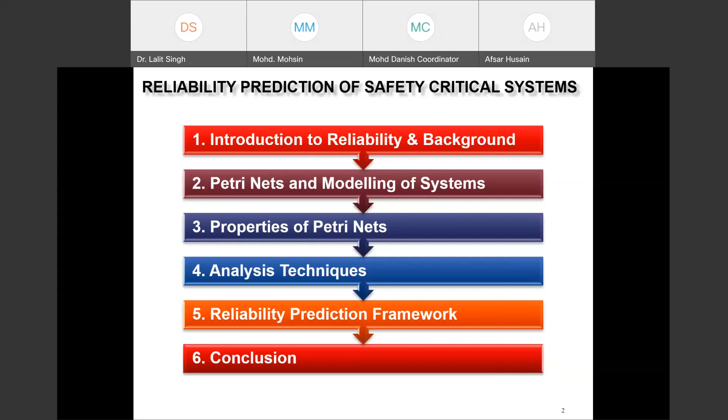Let us go through the mathematical definition of reliability. Suppose X is the random variable that represents the time to failure of a component, because the system comprises a lot of components. So X is a random variable representing the time required to fail a component.

If my target time is T, then the reliability of the component at time T, R(t), since reliability is a function of time, will be equal to the probability that this random variable must be greater than T. Because if it is less than T, it means it is failing before the target time, so it will not be reliable. So the condition for component reliability is that the failure time must be greater than the target time, meaning it should fail only after the target time gets completed.

From the total probability law, it can be equated to 1 minus the probability that X is less than or equal to T. This probability that X is less than or equal to T means the system has failed before the target time, so it is the failure probability. It can be written as 1 minus failure probability, which is also a function of time, with notation F(t). This failure probability can also be called unreliability. So reliability is equal to 1 minus unreliability.

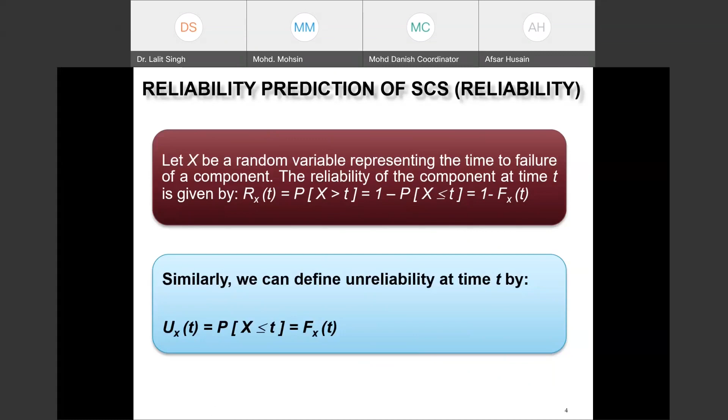Now let us look at some of the traditional methods for the quantification of reliability, before going to the Petri net modeling technique.

One of the prominent models is the reliability block diagram. It is a series and parallel reliability block diagram that represents the logical structure of the system with regard to how the reliability of its components affects the system reliability.

For example, if I have a laptop as a system, there could be various components including electronic or mechanical components, for example ICs, different ICs, capacitors, transistors, keys, push keys, mouse, push buttons, screen. These different components are arranged in series or parallel logic.

If the components are arranged in series and have certain reliabilities, then I can compute the total system's reliability by multiplying those components' reliabilities. For example, if I have a system with only two components, C1 and C2, arranged in series and having reliability R1 and R2, then the system reliability will be R1 into R2.

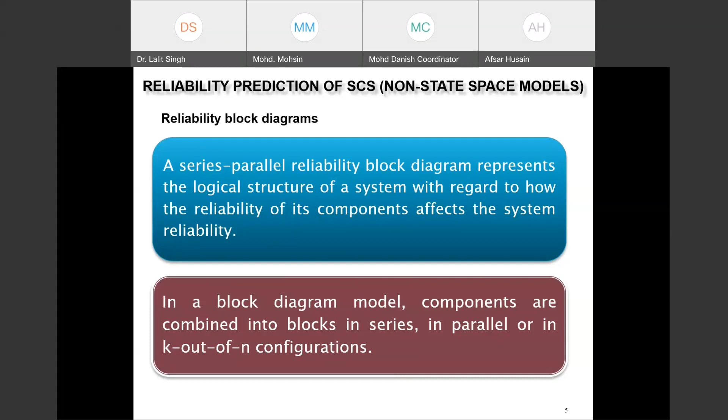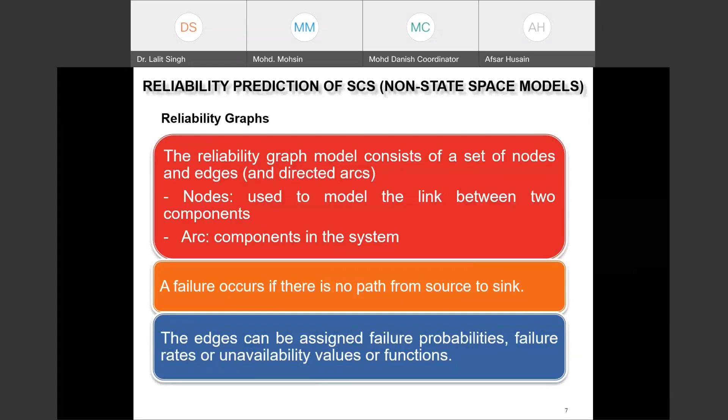Then the reliability graph, which is also a prominent model, consists of a set of nodes and edges, where nodes represent the link between two components and the edges represent the components in the system.

If you look at this figure, the left figure is the reliability graph where the nodes A, B, C, D are the component connectors, and the arcs V1, V2, V3, V4, V5 are the components themselves. This can be transformed into the reliability block diagram shown on the right side, where all the vertices are replaced by connectors and all the V's are replaced by the components themselves.

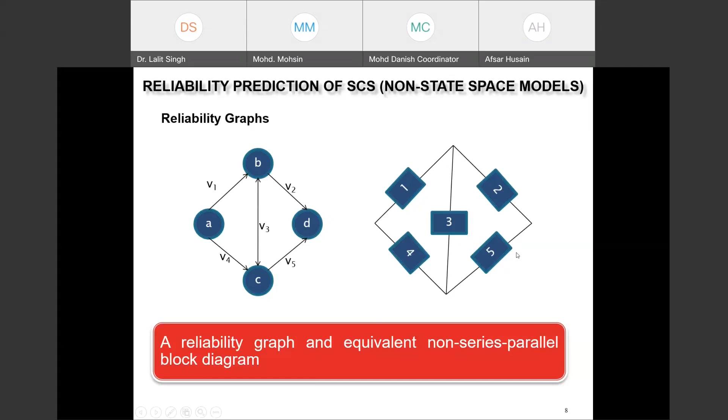The next very prominent model is known as the fault tree, which represents all the sequences of individual component failures that can cause the system to stop functioning, in a tree-like structure. For example, suppose the failure observation is that a human is not able to see. I'll have to deduce the reason, and the reason could be his left eye is not working and his right eye is not working. So I will have to put an AND gate, because there will be the AND logic.

Suppose the probability of failure that the left eye is not working is P1 and the right eye is not working is P2 respectively. Then the probability of failure of the human, that it is not able to see, will be equal to P1 into P2. So if the events are arranged in AND logic, you have to multiply the basic failure probabilities.

And if they are arranged in OR logic, you have to sum the basic probabilities. And because the top event will give you the failure probability, you have to subtract it by 1 to compute the reliability.

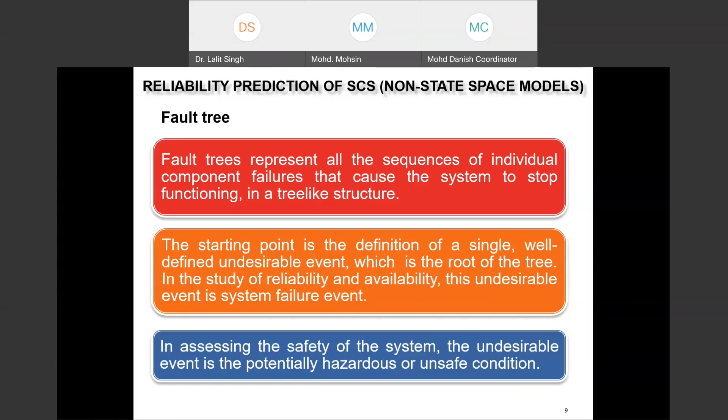Now, the models that we have looked at so far can be solved using the FAST algorithm, but it assumes stochastic independence between the system components. Meaning, if a system contains 3 components, I have to assume these components can fail independently, and one component cannot fail because of another component. But in a real scenario, this is not applicable at all, and hence the assumption that the failure or repair of a component is not affected by other components is not practical.

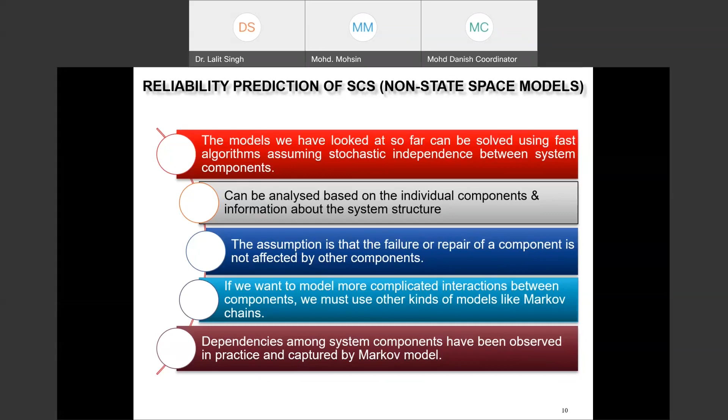And if you want to model such component dependencies, you have to use a more powerful model. So if you want to model more complicated interactions between the components, there are models like Markov chains or Petri nets. These have the potential to model such dependencies.

So if you look into the Markov model, the concept was introduced by Andrey Markov, who was a Russian mathematician in the 1900s.

He said every system can be composed of various states, and it can be broadly categorized into behavioral states and failure states. Behavioral states are normal states. For example, if a human is a system, the behavioral states could be running, eating, moving, talking, walking, sleeping, and the failure state could be meeting an accident.

From one state, I can transit to another state. For example, if I'm eating, I can transit to taking rest. From taking rest, I can transit to moving.

If I'm able to somehow find out the probability of my system being in all the states, then I can compute the reliability by summing up the probabilities that the system is in all the behavioral states. And I can find out the failure probability by summing up the probability that my system is in all the failed states. From that, I can also compute the reliability by subtracting by 1.

So before going to the framework, I will introduce some of the mathematical concepts that we will be using. Suppose there are 2 states, I and J, in a Markov chain, and let Qij be the transition rate from state I to state J. Transition rate means the number of transitions per unit time.

Then we can define the transition rate from state I to itself by summing, and that will be equal to minus the sum of all the transition rates from that state to the rest of the states. And this is what this formula represents.

Then we can define a term known as the transition matrix, or the transition rate matrix, in which I have to define a matrix with rows and columns. On the row side, you write down all the states of the system, and on the column side also, you write all the states. Then you fill in the matrix elements with the transition rate from one state to the rest of the states, and that will give you the transition rate matrix, also called the generator or transition matrix.

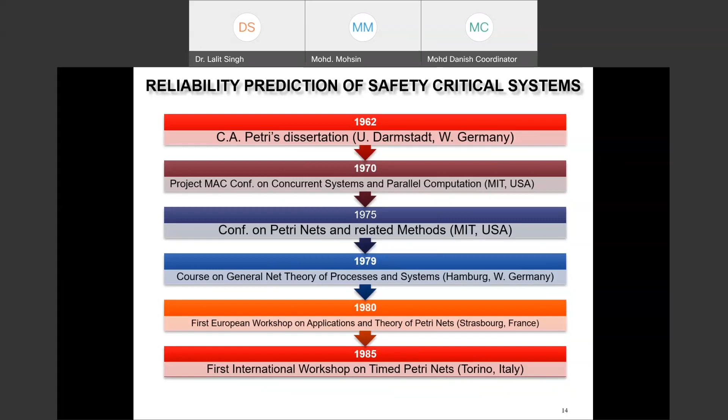And there are a lot of other flavors of the Petri net which keep on coming up. So this is not an exhaustive list, but it gives a motivation, starting from the origination of the concept of Petri nets to the various milestones that Petri nets have achieved and how they became so popular. And if you look into the applications, definitely a variety of applications can be modeled.

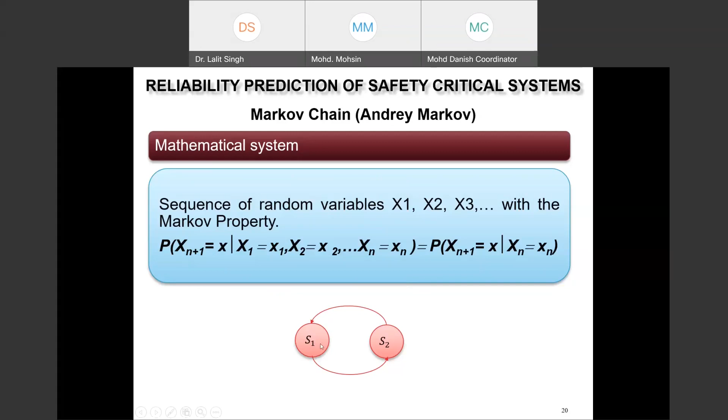It is just a random example to show how I can represent the Markov chain, which contains the 2 states S1 and S2, and S1 can transit to S2 and vice versa. And this is a random slide just to show how we can draw the reachability graph.

So if you look into this M1, which is a state, and the state is represented by the distribution of the token. So suppose there is a Petri net figure which contains 7 places having the token distribution 1 0 0 1 0 1 0. And this state we can term as marking also. So this is M1, and after firing of transition T1, suppose the token distribution has changed like this, which is represented by M2, and so on.

And this is a reachability graph, which can be equivalently converted into the Markov chain. So all these M's are nothing but the states. And in the Markov chain, I represent the states by circles. So these are 1, 2, 3, 4, and all the arcs are representing basically the transition rates from one state to another state.

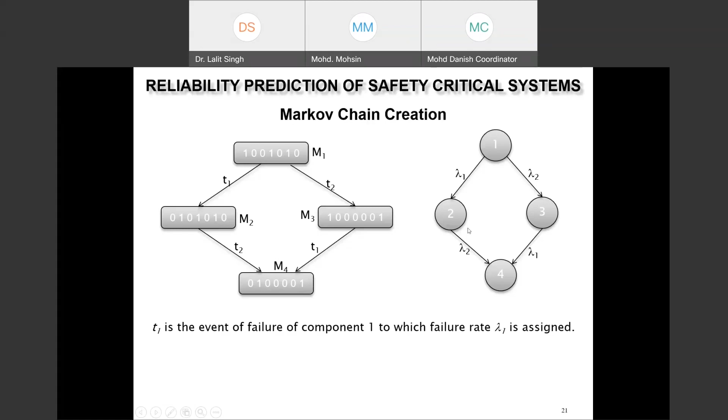Now let me introduce the reliability prediction framework, which contains 3 phases. One is the creation of the Petri net model of the system. The second is converting that Petri net model into the Markov chain. And the third one is reliability computation.

So the first two phases we have already seen, but definitely we will take a real case study in which I will again emphasize these 2 phases. And in the third phase I will be demonstrating how we can use the mathematical knowledge for computing the reliability of that particular system. And before going to the case study, I would like to introduce some of the mathematical concepts which are very important.

So let pi_i(t) be the probability that a component is in state i at time t. And as I said, the state could be failure states or behavioral states. So there could be M failure states from F1 to Fm, and there could be N behavioral states from P1 to Pn.

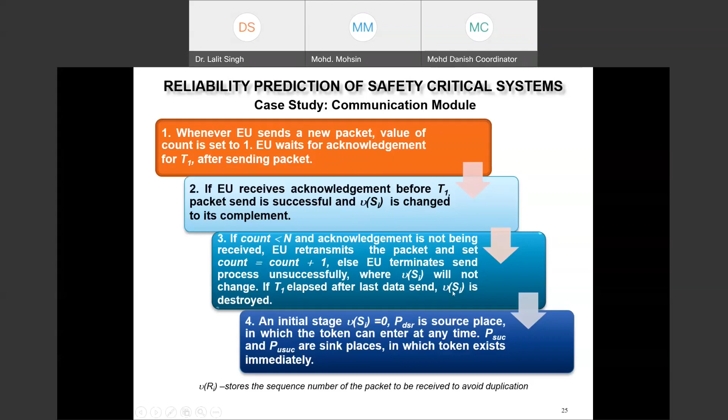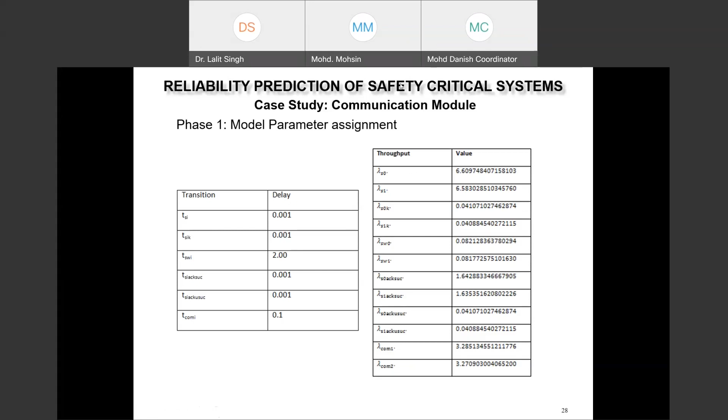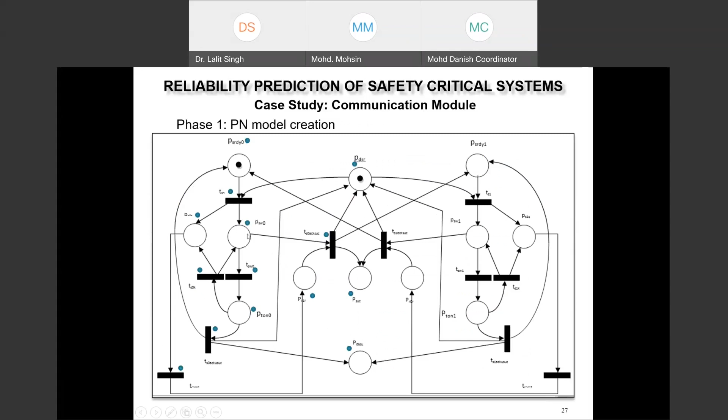Similarly, when the tokens are in these two places, this transition will fire and the tokens will be deposited, one here and one here, because the weight of the output arcs is 1. So you can see the next state: the token has been removed, so it becomes 0, and tokens have been deposited here and here, and the rest are all zeros. In this way we can keep deducing all the states, and these states are tangible because you have assigned some delay on the transitions. If they had zero delay, they would be immediate transitions with vanishing markings. But these are tangible markings.

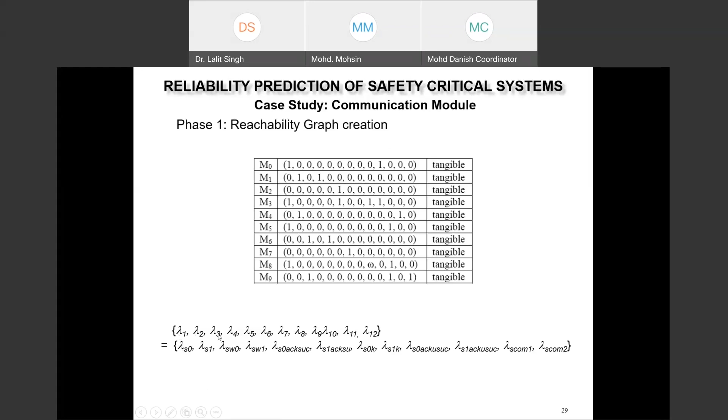Just for the sake of convenience, I have mapped all these transition firing rates to lambda 1, lambda 2, up to lambda 12. And now we construct the reachability graph, and this is the reachability graph we have constructed, and it can be equivalently transformed into the Markov chain, because, as I said, each marking is nothing but a state. So this is the state, and all the lambdas represent the firing rate of that particular transition. So this is the Markov chain creation.

And now we have to create a generator matrix. You can write in MATLAB and create the generator matrix. Let's see how.

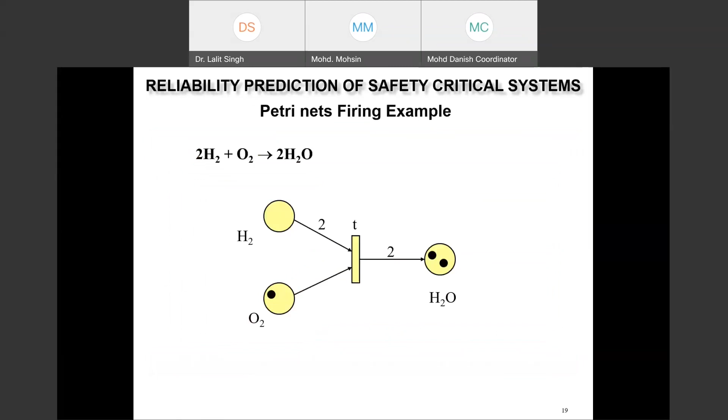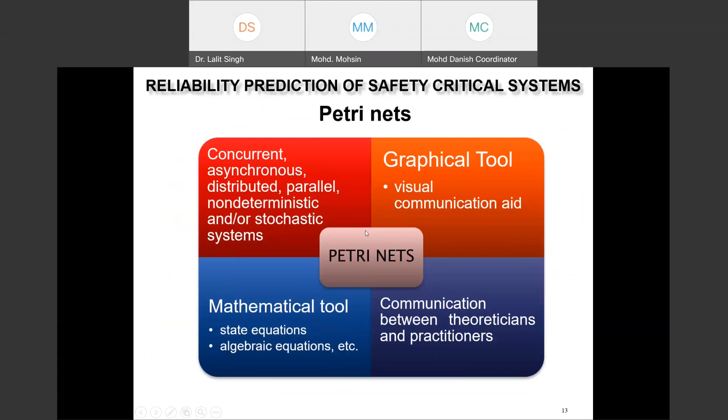Now you have to compute the transition probability. The transition probability from one state to another can be solved with very simple logic. To calculate the transition probability from state I to J, you have to normalize the transition rate. It will be equal to the transition rate from I to J, normalized by dividing by the sum of all the transition rates from that particular I to the rest of the states. And if I is equal to J, all the values will be 0.

This is the way you can compute a transition probability matrix. You can write the program in MATLAB and solve it.

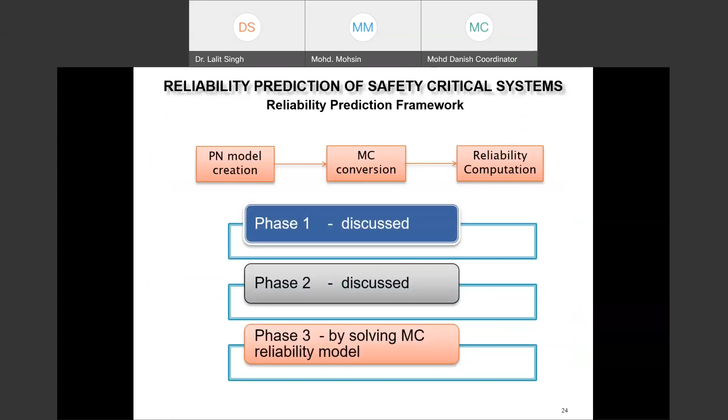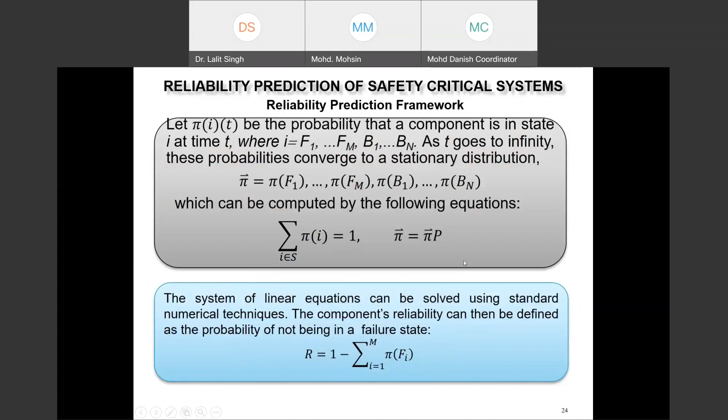Now you have to use those two equations I was discussing for the stationary distributions, which are the important equations. One is that M0 plus M1 plus up to all the states will be equal to 1. The second equation is this final states vector, which remains the same as the previous states in the case of a stationary distribution, and you have to multiply it by the transition probability matrix you already solved, and then solve.

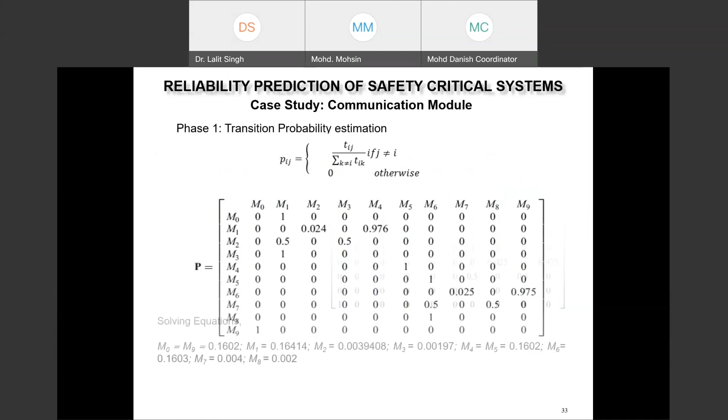After solving, you come to know the state probabilities of the system in every state. These are the probabilities of the system being in M0 state, M1 state, M2 state, and so on till M9.

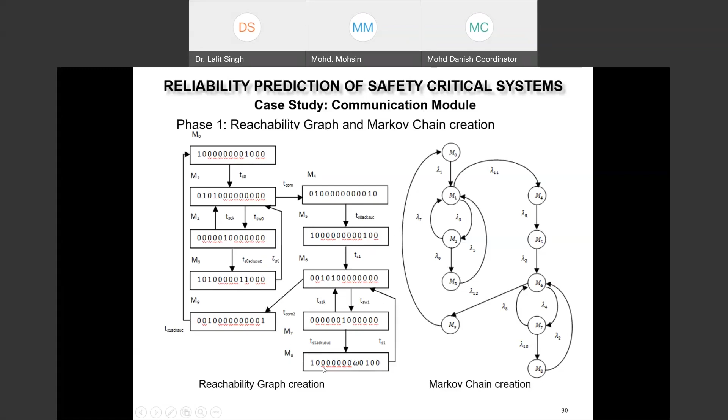Now, if you go back, M3 and M8 are the failed states, because here the acknowledgement of the packet is not successful. Since the behavioral states are many and the failure states are only M3 and M8, you can sum up the M3 and M8 probabilities and subtract it from 1. That will give you the quantification of the reliability.

That is what I have done here. I have added the state probabilities of M3 and M8 and subtracted it from 1, and it gives you the reliability of the entire communication module.

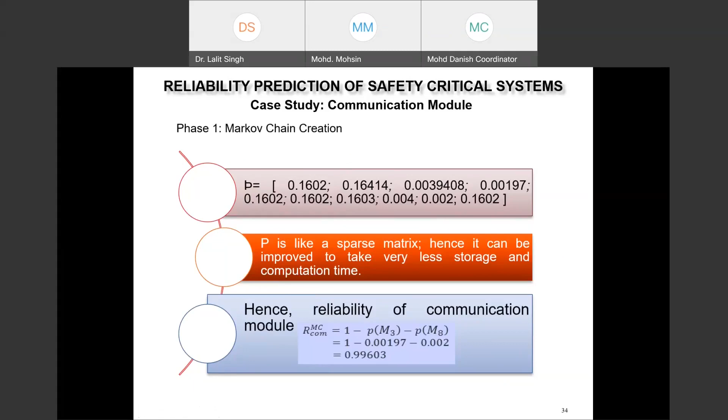So this is all what I wanted to share, and we have seen how we can compute the reliability of a particular system using mathematical modeling, and how we can make use of artificial intelligence, machine learning, MATLAB, and mathematical equations.

We have seen this taking a case study where I was interested in calculating the reliability of the communication module. If your system is very large, you can break it down into various components with respect to essentiality and non-essentiality, or with respect to the criticality of the functions, and for the functions that are more critical in nature, you can go for such kind of analysis, as failure of those functions may lead to very severe consequences.